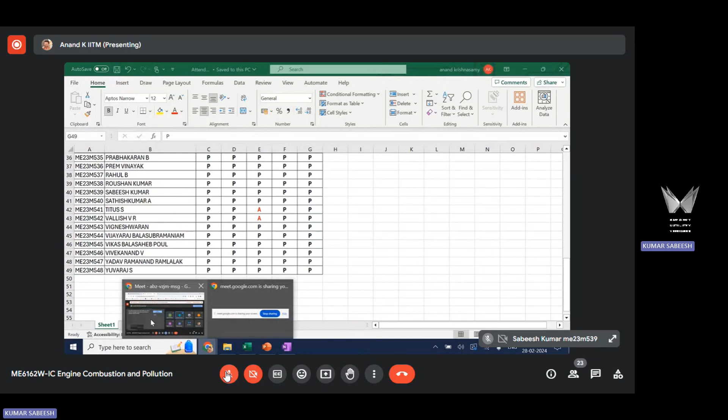Come prepared for the exam. As I said, you can come with your calculator and ID card. Those who are coming in person. 3 of you who are taking online mode will be taking exam in the online mode.

I will send out the instructions to you shortly about the procedure for the exam. The exam will be asked for 30 marks, and the contents you need to go through are chapter 1 and chapter 2. Chapter 1 primarily involves theory-based questions based on the concepts we discussed in class. Chapter 2, the questions will involve some problems based on whatever concepts we have discussed.

So it will be for 30 marks. There are no choices. You have to answer all the questions, in 50 minutes time. 50 minutes is the total duration. This is a standard practice we follow for all batches for conducting the quiz.

Any question? Whatever data you need will be provided in the question paper itself. No need to carry the table, but you need to carry your calculator. Answer scripts will be provided to you. No need to carry the answer scripts.

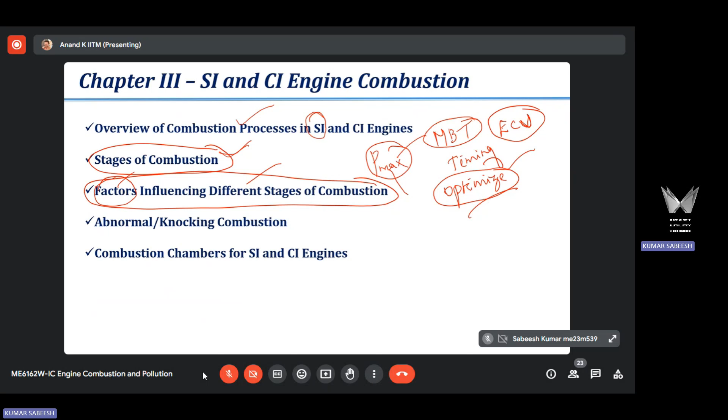So towards that, we are now going to look at these factors, engine design and operating variables, that affect the stages of combustion. Whatever stages we have considered, we are going to now look at the factors that affect each of these stages.

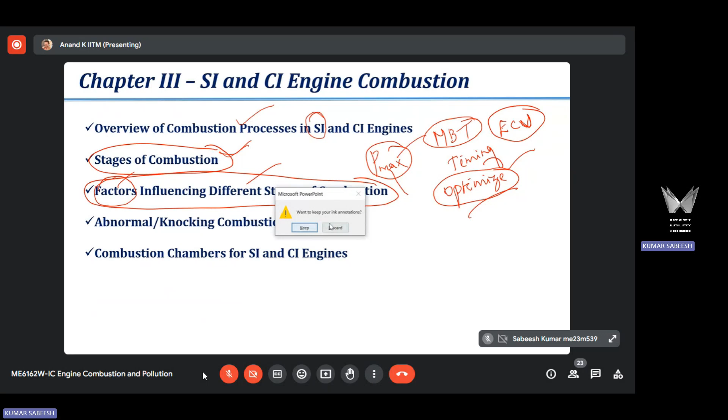Okay, so the first stage of combustion, as we know, is the flame development period. Let us consider this as FDP, flame development period. You know this flame development period is concerned with developing a stable flame in the engine. So the flame has to be stable. It's not about initiating the combustion event and forming a flame; it's also about how stable the flame is. If the flame is not stable, the combustion event cannot sustain.

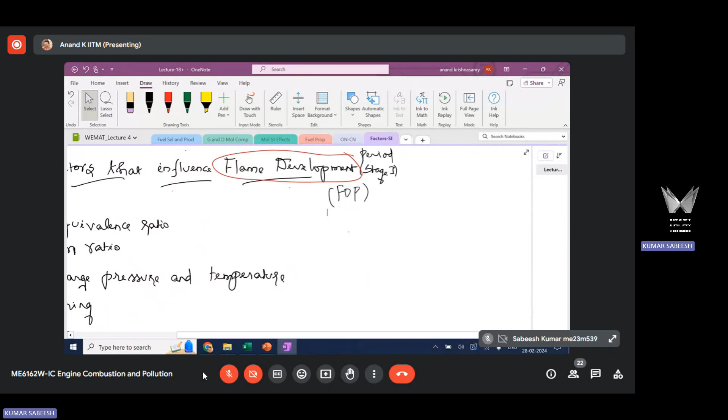So we have to ensure that the flame that is generated due to spark discharge is stable enough to carry forward the combustion event. So there is some time lapse in this, and that time lapse is referred to as flame development time or flame development period. The process involved in forming a stable flame is mostly a chemical process, and this process depends on pressure, temperature, and equivalence ratio of the charge contained at the spark plug location.

So what I'm saying here is, this is the electrode gap, spark plug electrode gap. This is where you are starting the combustion event, by discharging electric spark in this region between the two electrodes, designated here as electrode gap.

In this region, you have fuel air mixture contained, and the volume of this region is so small. I already gave you specific typical specifications of this electrode gap. This is less than 1 mm generally, it varies anywhere between 0.7 mm to 1.7 mm, and this needs to be optimized based on the type of SI engine. This is the normal range of the electrode gap.

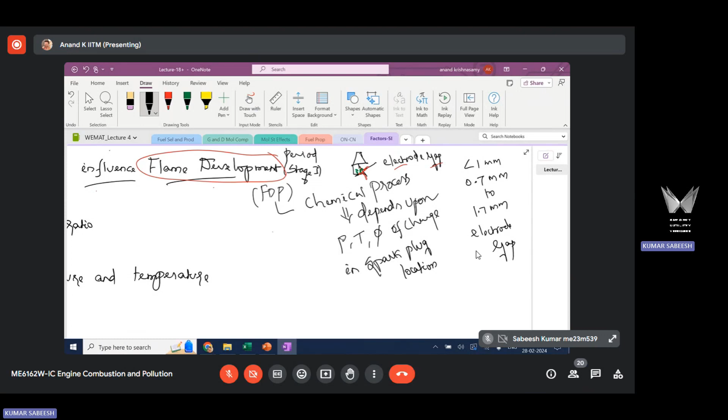So you have a small volume of fuel air mixture contained in this region, and this mixture is what is going to be ignited by discharging electric spark. The time period required for forming a stable flame is basically a chemical process that depends on the pressure, temperature, and equivalence ratio of the charge. Charge here refers to fuel air mixture contained in this small region. That is what is going to get ignited, what is going to form a stable flame, and the time required for forming it depends on pressure, temperature, and equivalence ratio of the fuel air mixture contained in this region.

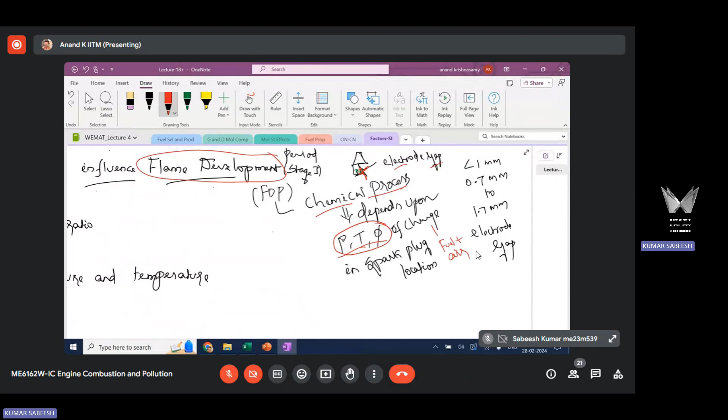Now with that understanding, we are going to look at these variables or factors. The first one is fuel type, the type of fuel we use in the SI engine. Different grades of gasoline have different properties. One predominant property that affects the flame development period is octane number, which is a measure of antiknock quality. We know antiknock quality and ignition quality are inversely proportional. So the time taken to form a stable flame depends on the fuel characteristic, primarily the octane number of the fuel.

The second variable is fuel air equivalence ratio, which is also important for the flame development period. Then we have compression ratio. Fuel or equivalence ratio is an operating variable — you can vary it when the engine is running by varying the proportion of fuel and air. So phi is a variable; when the engine is running, you can vary the phi value by controlling air mass and fuel mass. So it's an operating variable.

Is compression ratio a design variable or an operating variable? It's a design variable, because compression ratio is defined as total volume, which is the summation of clearance volume and displacement volume, divided by clearance volume. Since clearance volume and displacement volume are fixed once you design the engine, compression ratio is a design variable that affects the flame development period.

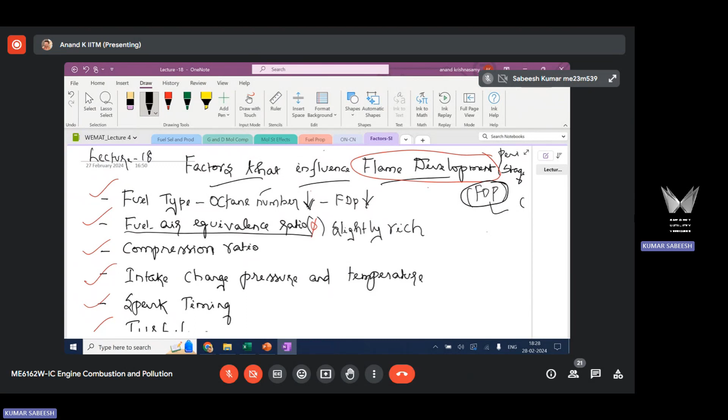Why will slightly rich result in a shorter flame development period? If equivalence ratio equals 1, combustion is stoichiometric, but there is still some oxygen left in the mixture that gets consumed, just like with a lean mixture compared to stoichiometric, a rich mixture eventually results in very high temperature. The mixture proportion that results in higher temperature reduces the flame development time. As I said, it's a chemical process depending on the prevailing temperature, pressure, and equivalence ratio. So a slightly rich mixture results in higher temperature, and higher temperature reduces the time required for developing a stable flame. We prefer a slightly rich mixture to reduce flame development time.

Compression ratio: should it be higher or lower to reduce the flame development time? It should be lower. So it should be higher. Should be higher. So I got both answers, higher and lower. For higher, sir, I would say it will have to travel less. No, there is nothing related to travel here. We are talking about the time required for forming a stable flame at the spark plug location, it has yet to travel or propagate across the combustion chamber.

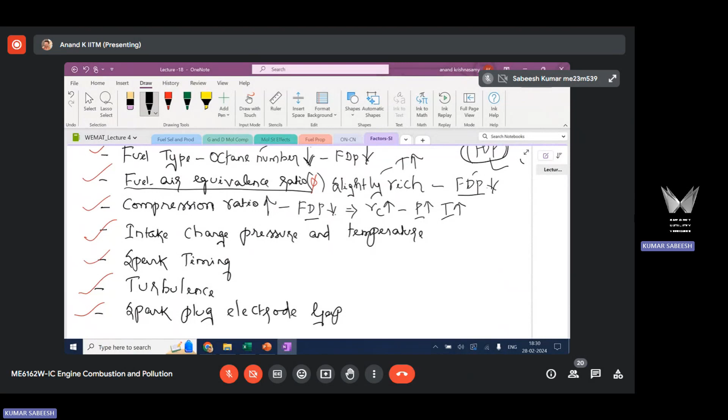It's directly correlated. When the compression ratio is less, the mixture in the spark plug location will have lower pressure and temperature. When I increase the compression ratio, the mixture here will have higher pressure and higher temperature, which will reduce the stable flame development time.

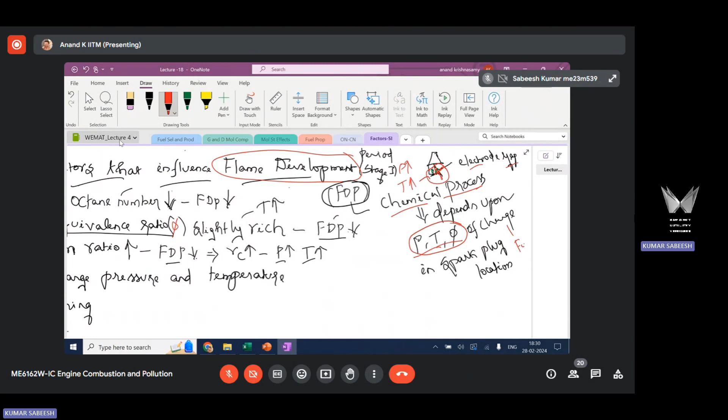Then we have intake charge pressure and temperature. This is directly correlated, as you know: when you have a higher intake charge pressure or higher temperature, the development time is going to be shorter. So flame development time is sensitive to pressure and temperature. If you induct charge at higher pressure and temperature, the time taken for forming a stable flame goes down. Now the next one is spark timing.

When you talk about spark timing, there are two things: one is advancing the timing, and the other is retarding it. Retarded is also called delayed timing. Now, which one will result in shorter flame development time, advanced timing or retarded timing? Advanced.

Why so? We are igniting at maximum pressure and temperature. Advanced timing results in maximum in-cylinder temperature, as we introduce the spark when the combustion chamber has the highest temperature, or when it is closer to top dead center.

Okay, any other answer?

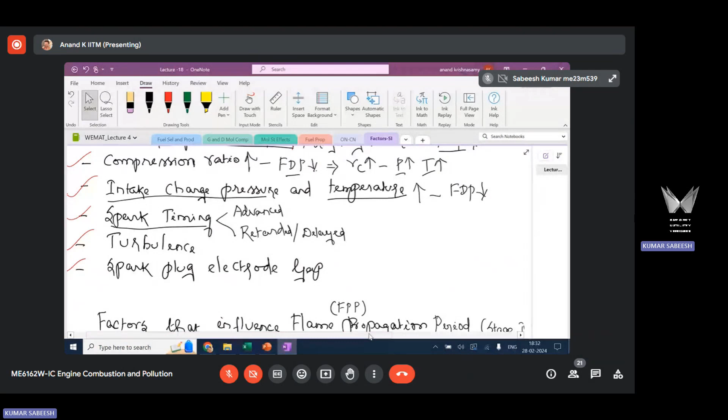Retarded timing will be better, sir, because at retarded timing, the effective compression ratio at that time will be higher. So basically, at retarded timing, the piston will be closer to TDC, then you're giving the spark. So at that particular instant, compared to advanced timing, the CR will be higher.

Perfect. So this is preferable from the perspective of reducing flame development period. Why? Because the reference is always compression TDC. When I say advanced spark timing, I'm discharging electric spark somewhere here, with the piston located here. When I say retarded timing, the piston is located here, with reference to compression TDC point.

Now, when you compare the effect of advanced or retarded timing in terms of charge pressure and temperature: when you advance the spark timing, you discharge the spark at a point where effective compression is relatively less. When you delay the spark discharge, the piston would have moved further, this is case 2. For case 2, in-cylinder pressure and temperature will be higher, sir.

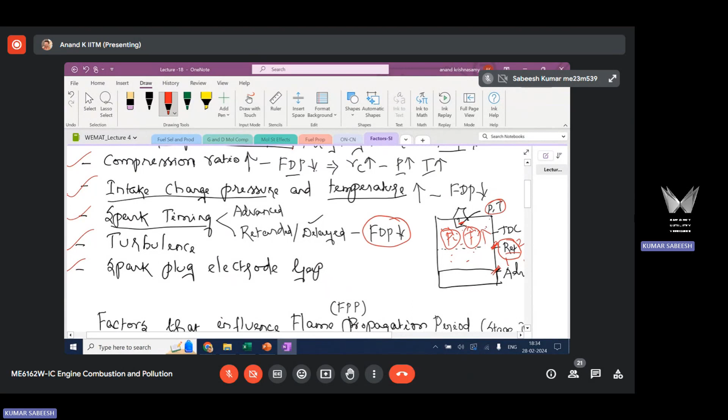Now let us look at turbulence. Turbulence is nothing but fluid motion inside the engine cylinder. So do we prefer more turbulence or less turbulence at the time of spark discharge so as to reduce flame development time? It has to be more, sir. Why do you think it has to be more?

So the air motion will be more, so mixing will be high, reducing flame development time. But at the time of flame development, if there is more turbulence, the heat loss will also be high, right? We want to form a stable flame. I said during spark discharge we discharge 10 times higher thermal energy, primarily because the heat loss is initially very high, that's why we have a high factor of safety.

Now, what will happen if turbulence levels are high at the time of flame development? Any flame you take, when there is appreciable fluid motion during flame formation, what happens to the flame? When the flame is subjected to turbulence, what happens to its stability? It will get disturbed. Stability will be poor, right? When there is appreciable turbulence, stability will be less.

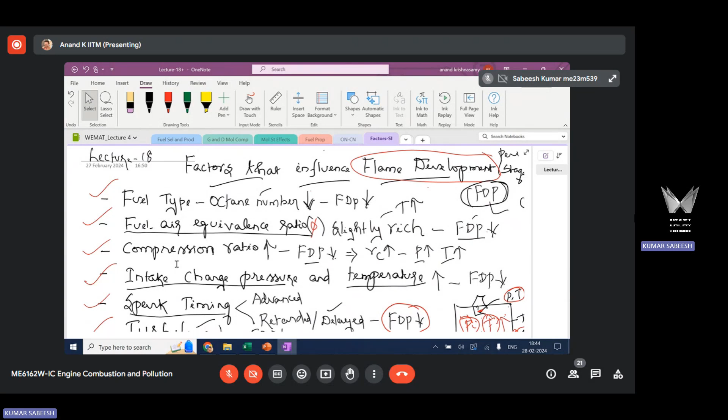The second stage is an important stage of SI engine combustion because this is the flame propagation period. During this period, 80% of the charge is burned, and during this time the peak pressure or maximum pressure in the engine happens, and that is what is converted into useful work. From that perspective, we also discuss MBT timing. So this stage is one of the most important stages in the SI engine.

So we need to look at the variables that affect this stage. This stage controls power output because this is the period where Pmax occurs - maximum pressure happens during this period, and that is what affects the power output. There are two parameters here: one is Pmax, and the other is the occurrence of Pmax. The crank angle at which Pmax happens will affect the power output - both the magnitude and the timing will affect the power output of the engine.

Since 80% of the charge is burned, this flame propagation period is what results in the maximum pressure, and this controls the power output. This is also the period where knocking combustion or abnormal combustion may eventually result - later on we will discuss the mechanism behind knocking, because in this period most of the charge is burned. From the plot of flame travel distance and flame travel time that we discussed earlier, we have obtained a profile like this.

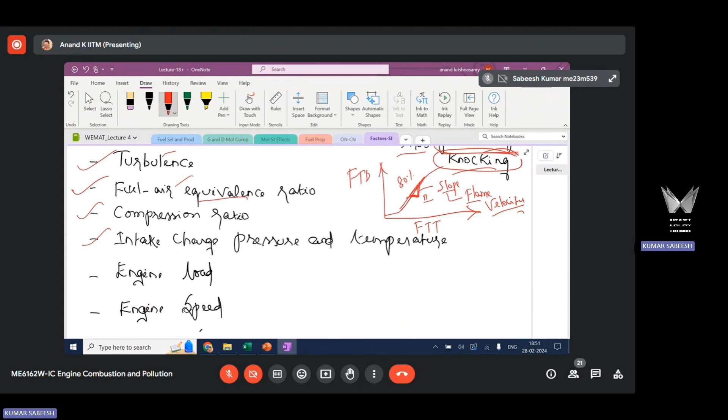Then we have compression ratio, which is a design variable. Intake charge pressure and temperature will also affect flame velocity, because based on this the prevailing pressure and temperature conditions in the engine vary, and accordingly the flame propagation time is different. Engine load - I will talk about its effect in detail in the next class - whether low or high, affects the flame propagation speed. Generally at higher load you have a high flame propagation speed, and at low load a low flame propagation speed; I'll discuss the mechanism in the next class. Engine speed directly affects the turbulence level in the engine.

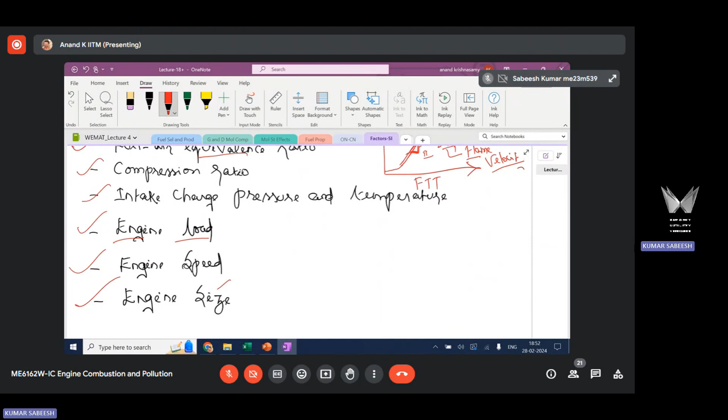Higher the engine speed, higher will be the turbulence level, thereby affecting the flame propagation period. The last variable is size of the engine, referring to bore and stroke, two important dimensions that affect displacement volume and also affect flame propagation speed. This is again a design variable. We'll see in the next class in detail how these design and operating variables affect the flame propagation period, which is stage 2 of SI engine combustion. I'll give more finer details in the next class.

It's time up, I stop here. If you have questions, I can take your questions now.

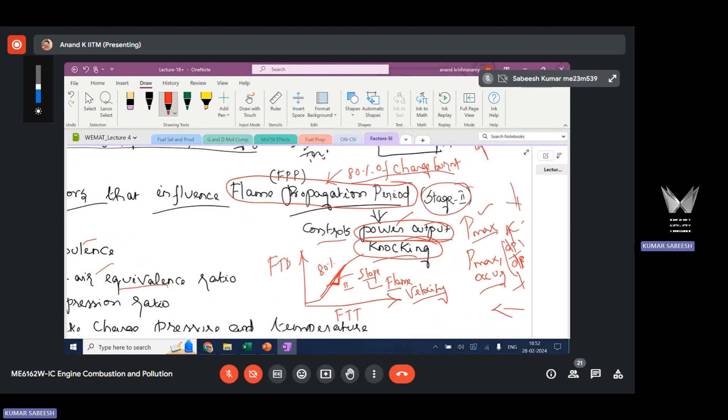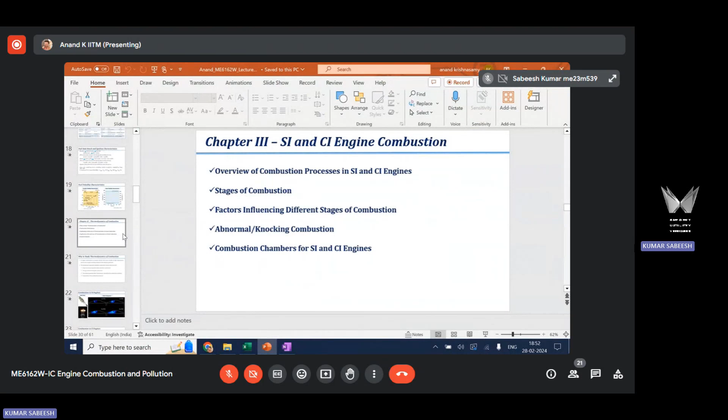Professor, this is regarding the previous class notes, like heating value at constant pressure. If you can open the slides, it will be great. I'm sorry to trouble you. Heating value at what? So, constant pressure. From your notes, sir, I think it is slide 12 or 11, if I'm not wrong. So come down a bit, sir. Exactly, so over here, okay.

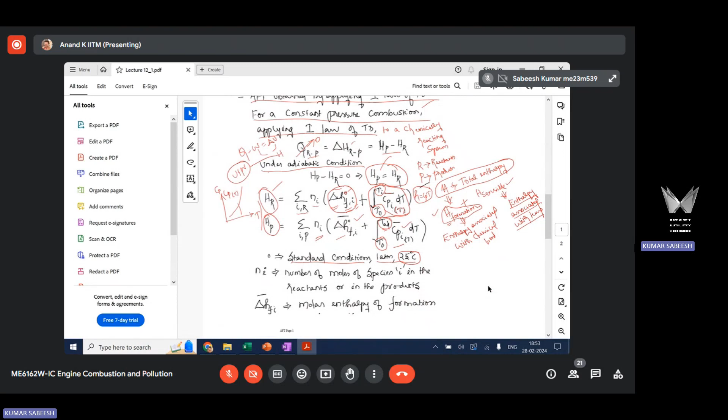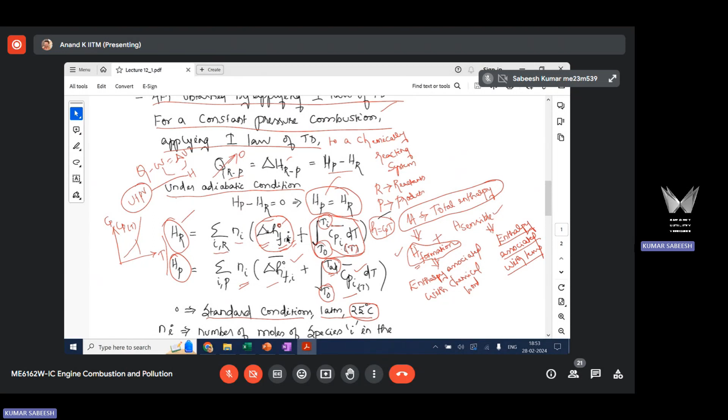So enthalpy of reactant is basically the summation of number of moles into enthalpy at standard condition, and then T0 to Ti. And enthalpy of product is again the same. Now sir, if the reaction is happening at standard condition, suppose at room temperature, then the sensible part, T0 to Ti, will become zero, if my understanding is correct. Suppose if the initial temperature is equal to standard temperature, then there is no effect of sensible enthalpy, so this will become zero, right sir? Yes, yes, it will be only enthalpy of formation because it is happening under standard condition. Thank you so much, that was the confusion I had. Okay, thank you sir.

Any other questions? And sir, generally, suppose if he asks to find the adiabatic flame temperature in a problem, do we have to consider constant volume reaction or constant pressure reaction? That will be mentioned in the problem itself.